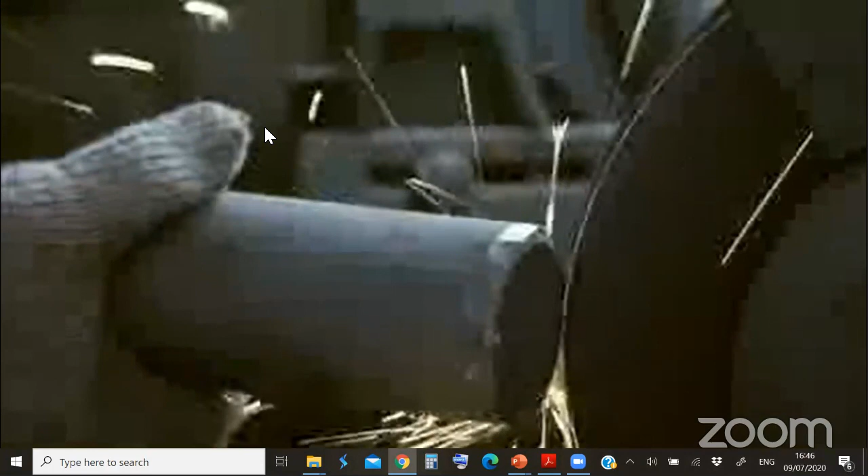I came to work that morning. I saw my friend Ramesh feeding the birds. The rest of my colleagues were busy in the workshop. No one was expecting the foreman Tariq or us to help him at the pit. Hi, good morning everybody. Come, let us go to the man. The foreman told us to come and finish a small job and we would do the permit later. The team set off, without a permit, to work in a hazardous area. This was a deadly shortcut. It was to be their last journey.

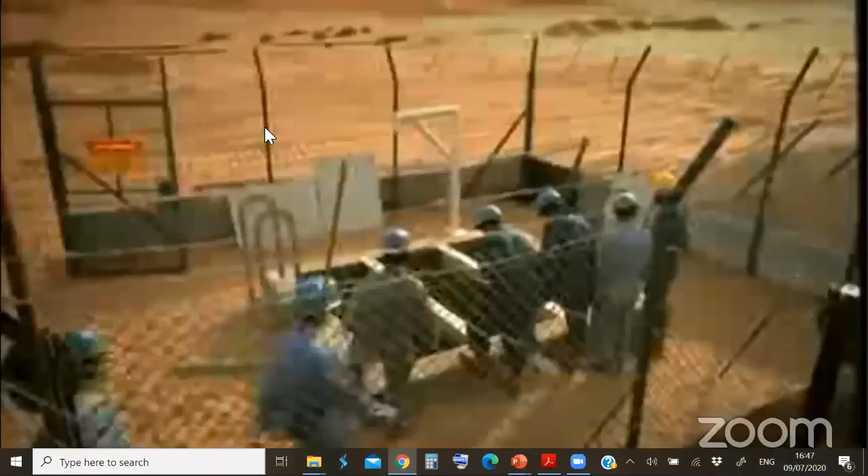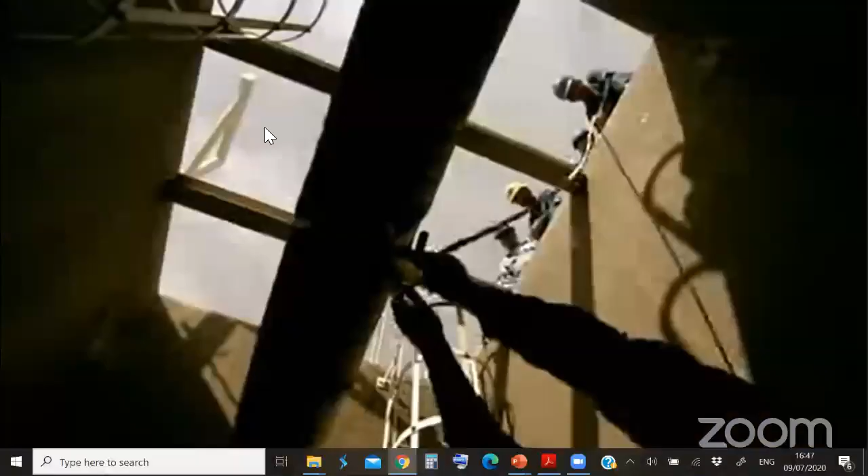Hydrogen sulfide, commonly known as H2S or rotten egg gas, is invisible, heavier than air, and deadly, even at low concentrations. Ramesh descends into a toxic death trap. Ramesh was told to go down into the pit and fix the rope that had slipped off the valve. Then I saw him climb up the ladder to the second and third step, and then he fell down.

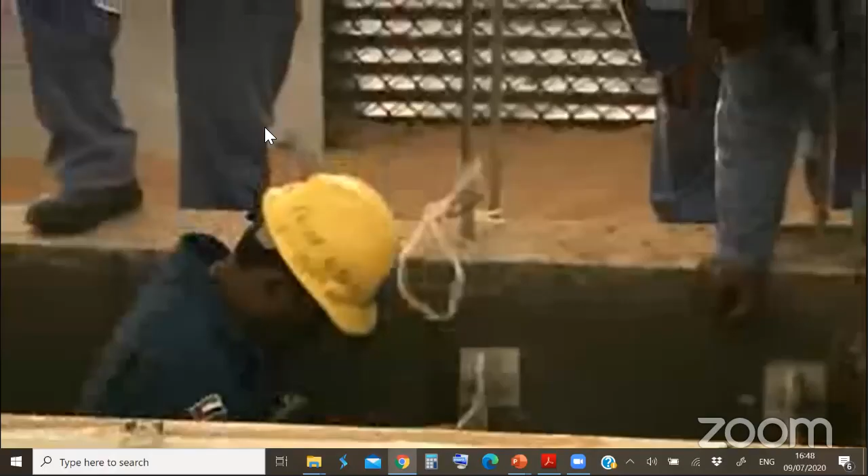The foreman called out to me, 'Stop the pump.' I didn't know what was going on. I could see Tariq trying to lift Ramesh up, and within less than a minute, Tariq had collapsed to the ground. Panic takes over. Kabir rushes down into the pit. Mustafa leaps down the other side, but the men have less than a minute of exposure to H2S before they fall unconscious.

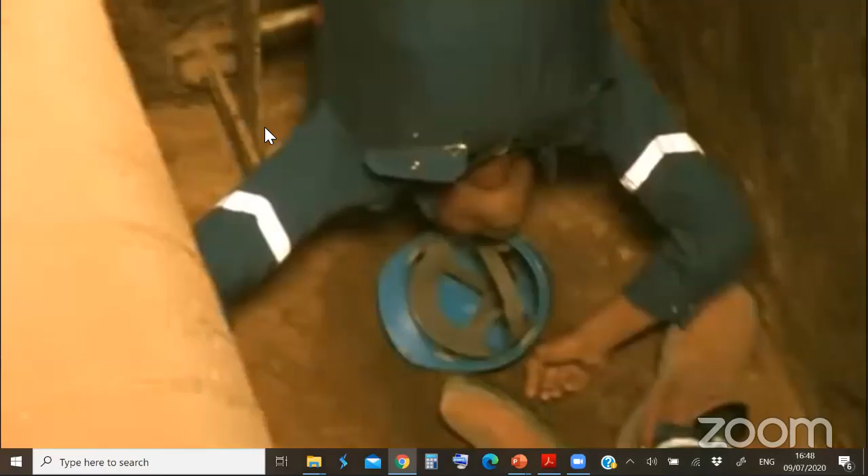Hello? Hello? What? Kilometer 58? Okay, I'm just coming now. Hello? Hello, there is an accident at kilometer 58. Please initiate the siren immediately. Emergency at kilometer 58. Please mobilize.

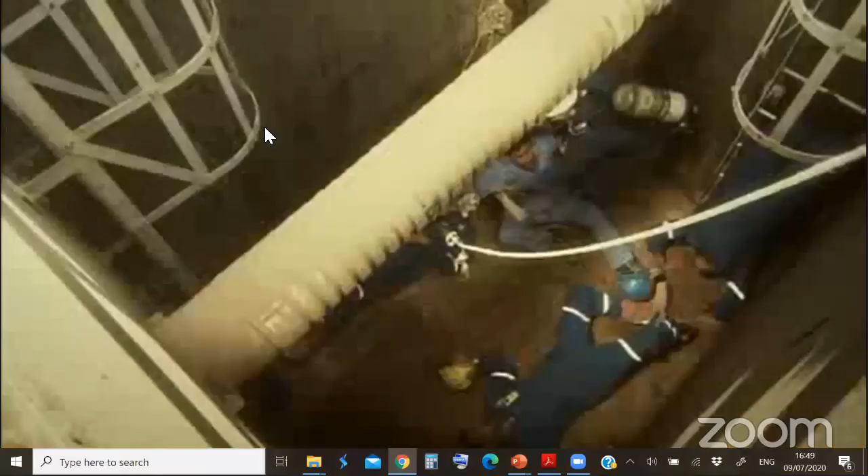And everyone was shouting, 'There is gas, there is gas.' I was afraid, but I knew I had to help them. When I reached that location, I immediately came to know this accident was because of H2S. And I saw Sabar already there trying to lift Mustafa. It was really shocking to see all of my foremen and my labor lying on the ground. I was lost for a moment. I really felt how this had happened. It was a big shock for me.

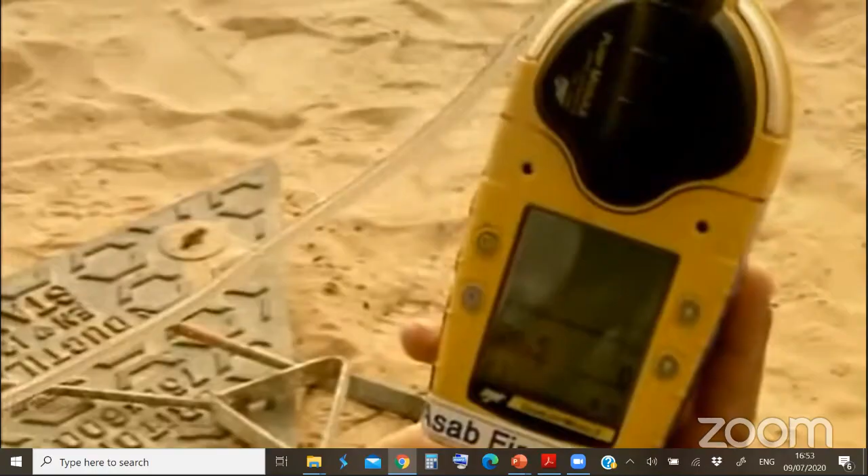Each individual in the field has been provided with an H2S detector. Even the contractors, even the laborers, even the drivers. What are the risks we will be involved in this job? First of all, H2S, hydrocarbon, oxygen.

Hydrocarbon industry is a risky business by nature, and safeguards are developed to ensure that we protect our employees and the contractors that are engaged with us.

A lesson that came across these procedures: there are times that due to over-experience and complacency, these procedures are not fully adhered to. This incident is one that should never be repeated again and should not happen again to our operation. We shouldn't be encouraging shortcuts. Shortcuts, unfortunately, are long cuts, and people are hurt.

Keep people aware of H2S and the consequences of having this gas released. Also keep training. That's an important part of our business. Training, training, and training.

Okay, tighten from the arm. Just pull backwards.

Gentlemen, we must remember that we work in oil industries. There are rules and safety rules available, and we must follow these rules.

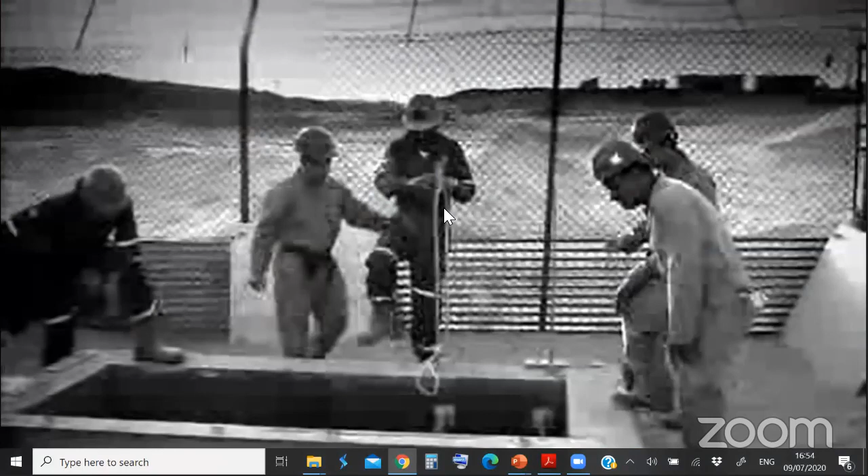ATCO permit system is designed in a fully safe way actually. There are a lot of controls in place before anybody starts the work. We have a job performer, we have a job originator, we have area authority, we have issuing authority, we have gas testing. And all are independent.

Nobody, a single person is not responsible for it. There are about 5 lines of safety involved to do a job. And if you follow that permit system, you will never go wrong.

We need to safeguard our system from any future accident. We should and will never allow this accident to happen. It's our responsibility to avoid such accidents from reoccurring.

Lots of lessons have been learned from this tragic incident, and we have engaged the whole organization to make sure that we do not face this kind of threat.

We understand our lives by looking backwards, but we live them forward. So we keep moving onward, never forgetting those who have passed, because their memory will inspire a safe future. We will remain an unbroken chain, linked together and dependent, safeguarding what we value most: our lives,

Moving on to the next slide, what is upstream? Upstream is E and P, which is exploration and production.

So what we do - Bala Suryan is raising a hand. Yes, Mr. Bala Suryan, you can leave your doubts in the chat box, I can read it. Sorry, can we proceed? Can't chat, sir, sorry, I cannot message you. I can't hear you, Mr. Balasubramanian. Why can't you message? You can message to admin. Okay sir, he can read that.

Yeah sure, okay. So what is upstream? Upstream in the sense it is exploration and production. What is exploration? What do we do?

Before starting any oil field, before starting any production, before starting any kind of drilling, what we do is go and explore the field. We have divers, we have geologists, we have remote specialists - so many people are there. They go and explore, they take a scan of the complete area, and then they give us a report.

This oil normally comes from our earth core, and then we drill it and take it out. So this crude oil - what is crude oil? Crude oil is actually an ore, it will not come as an oil, it comes as an ore. Ore means a mixture of so many oxides, liquids, fluids, and residues. This ore, what is crude, is called black gold. This crude, what we take, we cannot use it directly. Whatever you are fetching in your vehicles - petrol, diesel, kerosene - all comes from crude. How does it come? What is happening? We are feeding this crude somewhere, and then something is coming out.

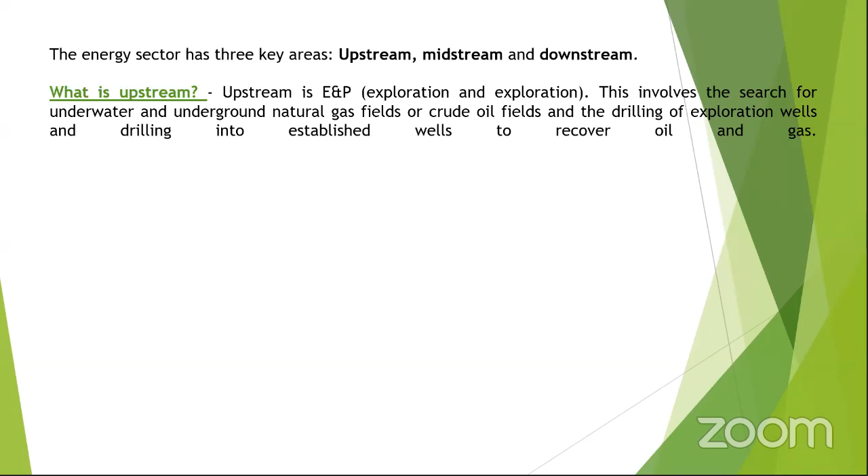Next is what is midstream? Midstream is nothing but the preliminary crude oil processing, storage, and transportation. In upstream, we already took out the oil from the earth crust. Once it is taken out, we need to do a preliminary washing and processing. We'll check what washing and processing means in the next process flow diagram.

Next is downstream. What is downstream? Downstream is mainly a refinery. The refinery product is coming to you as a domestic product, or you can say retail products.

So the crude oil - can you see the cursor, Shiva ma'am? Yes, I can see the cursor.

Okay, so this upstream means we are actually taking out oil from the earth crust. This part is only taking out drilling, exploration, and production - that is E and P. Next is midstream - midstream means we are just doing the preliminary processing, washing the crude oil, taking out the gases, and giving it to the downstream.

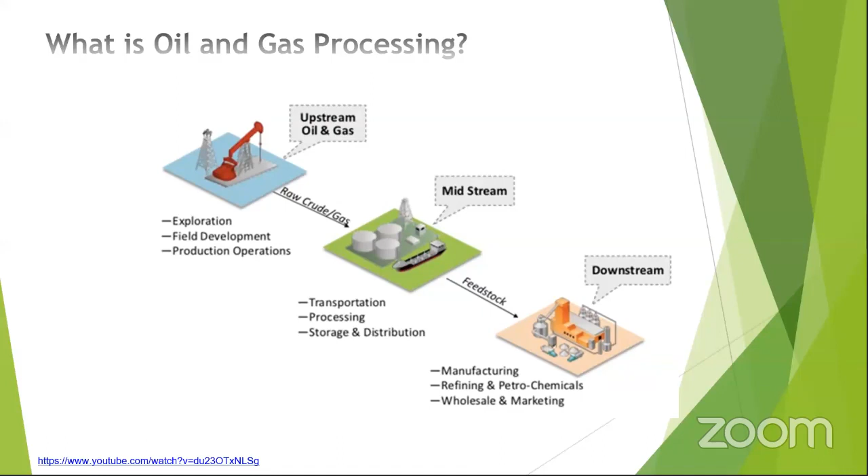From the refinery, all the residues go to so many other companies - ethylene plant, ETP, TTP, WWTP, STP - so many plants are there. You can see paint companies, resins, rubber, and so on. Nothing from the crude oil is a waste. Even the residue is used as grease and bitumen, tar for laying roads. So anything A to Z from the crude oil is used as a product - hydrogen, wax, a number of products.

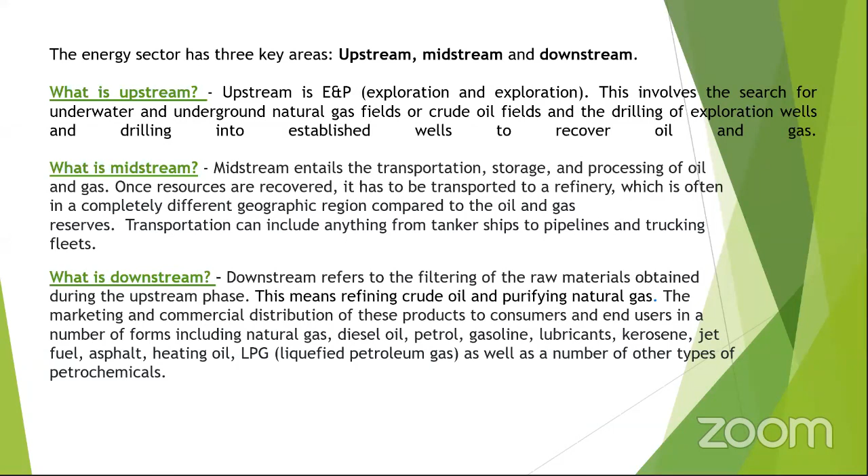Excuse me. Hello. Sir, you can continue, sir.

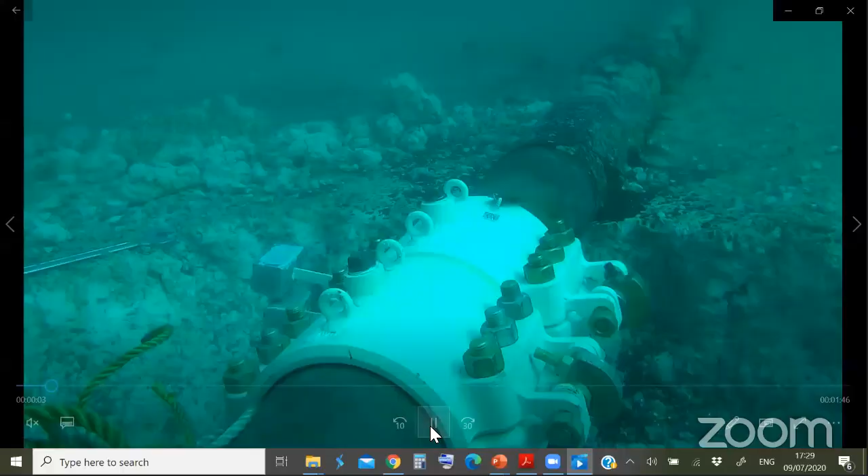Okay, hope you all saw that video, right? In the video, under the seabed, it looks like that. So that's how we will take out the crude oil. Hope you saw that video, right? Yes, we saw it.

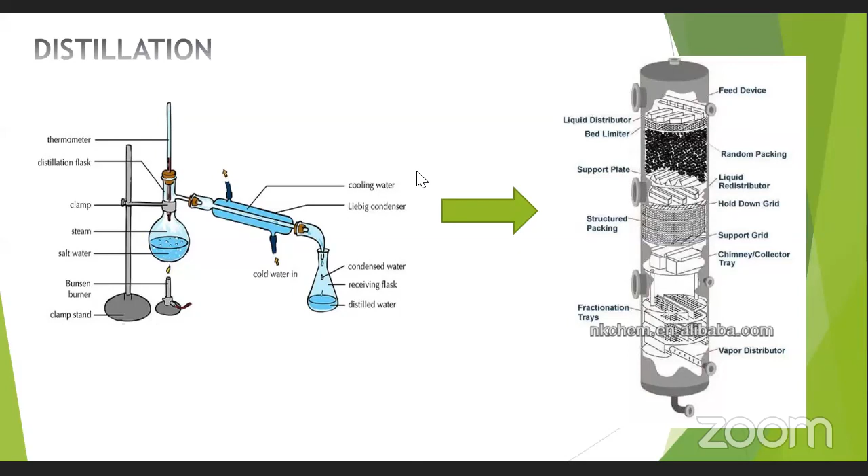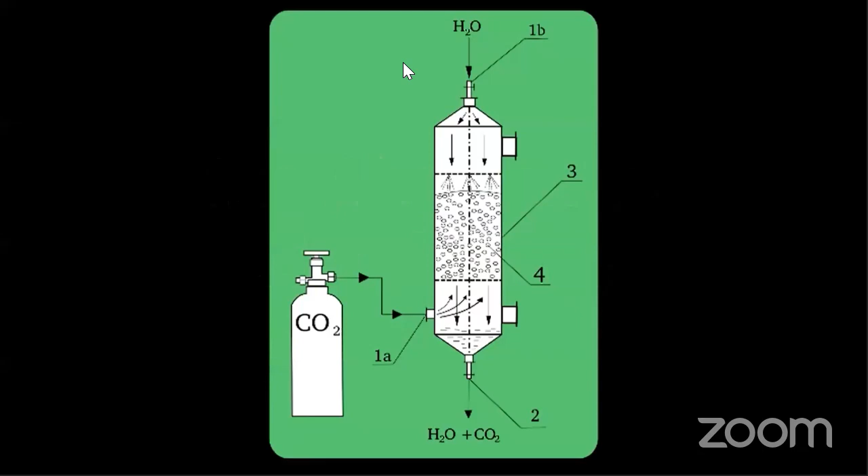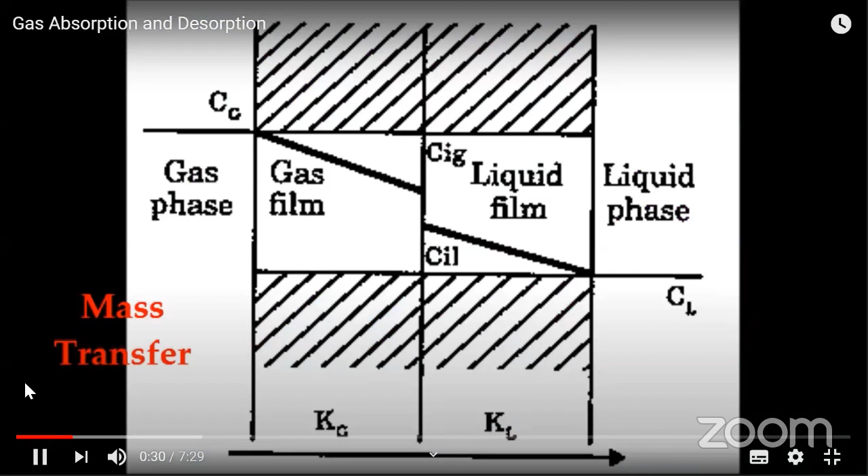Gas absorption or scrubbing is an operation in which a gas mixture is contacted with a liquid for the purpose of dissolving one or more components of the gas mixture and providing a solution of them in the liquid. Therefore, we can see that there is a mass transfer of the component of the gas from the gas phase to the liquid phase. The solute transferred is said to be absorbed by the liquid.

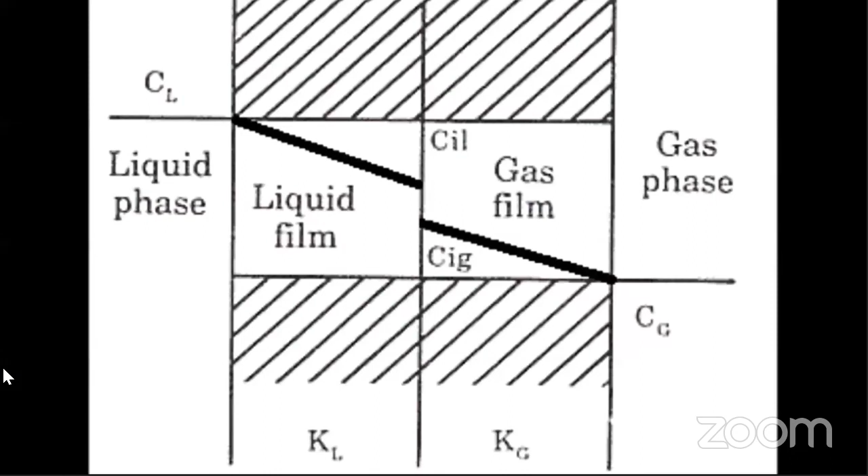In gas desorption or stripping, however, the mass transfer is in the opposite direction, that is, from the liquid phase to the gas phase. Here, two components of a liquid are separated by contact with the gas. The principles for both systems are the same.

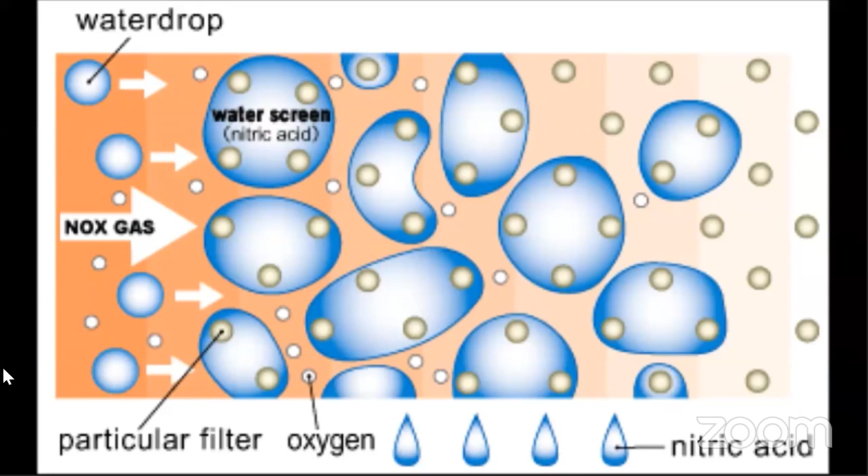An example of gas absorption is in the carbonation of beverages. Carbon dioxide under pressure is dissolved in the liquid beverage, so that when the pressure is subsequently released on opening the container, effervescence occurs. Another example is the removal of ammonia from air by contact with liquid water. Ammonia is very soluble in water, whereas air is only slightly soluble.

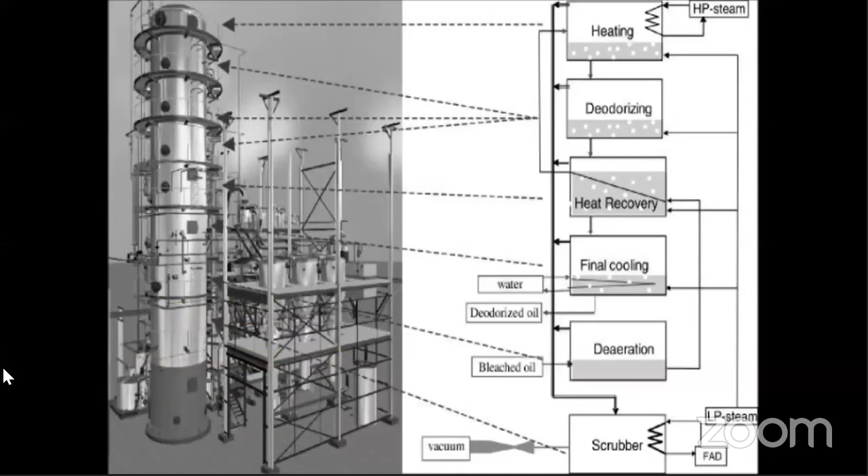For desorption, one example is found in the steam stripping of fats and oils, in which steam is brought into contact with the liquid fat or oil, and undesired components of the fat or oil pass out with the steam. This is used in the deodorizing of natural oils before blending them into food products such as margarine, and in the stripping of unwanted flavors from cream before it is made into butter.

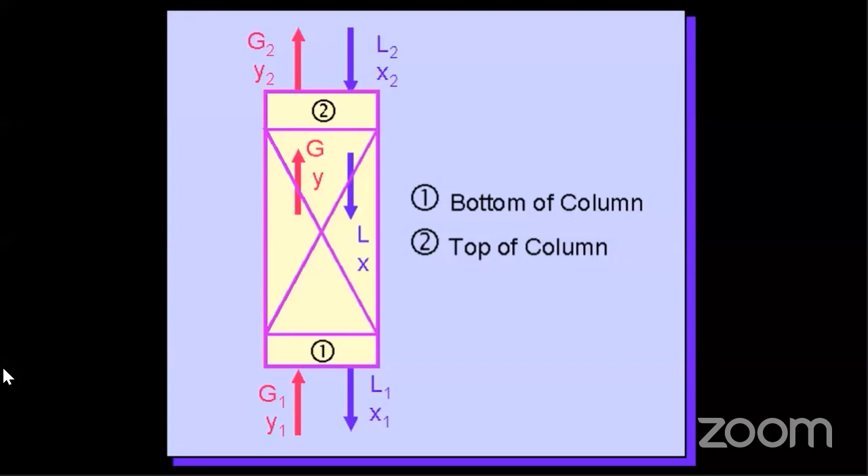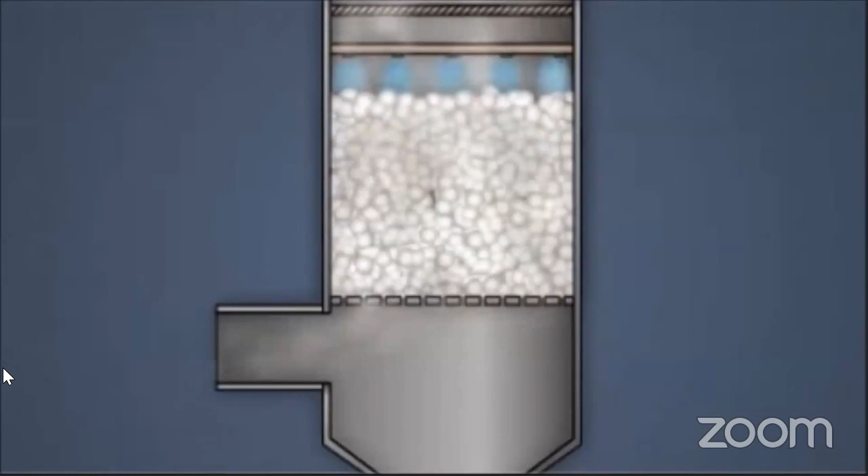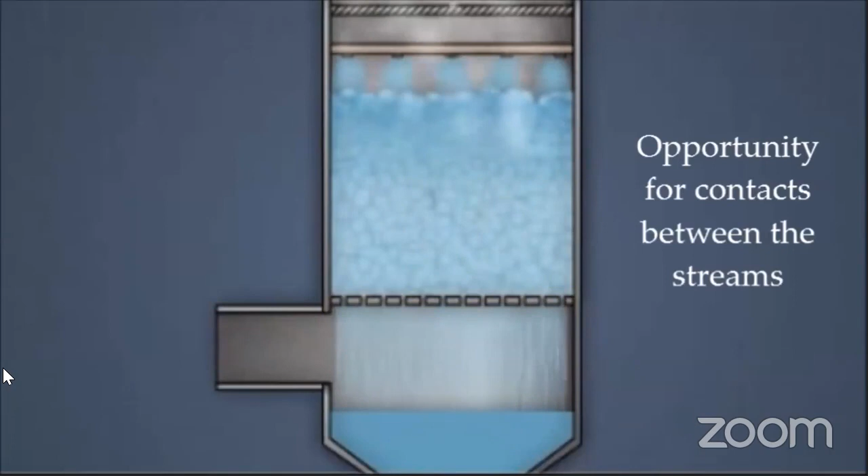The equilibrium conditions arise from the balance of concentrations of the gas or the volatile flavor between the gas and liquid streams. In the gas absorption process, sufficient time must be allowed for equilibrium to be attained so that the greatest possible transfer can occur, and also opportunity must be provided for contacts between the streams to occur under favorable conditions.

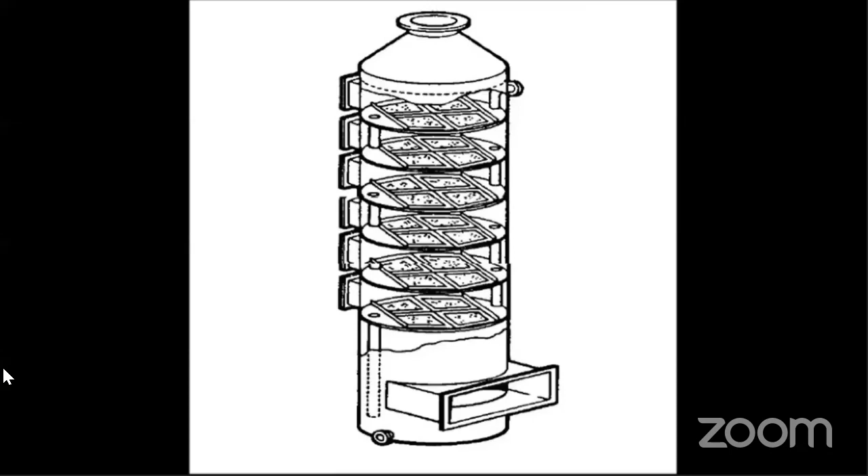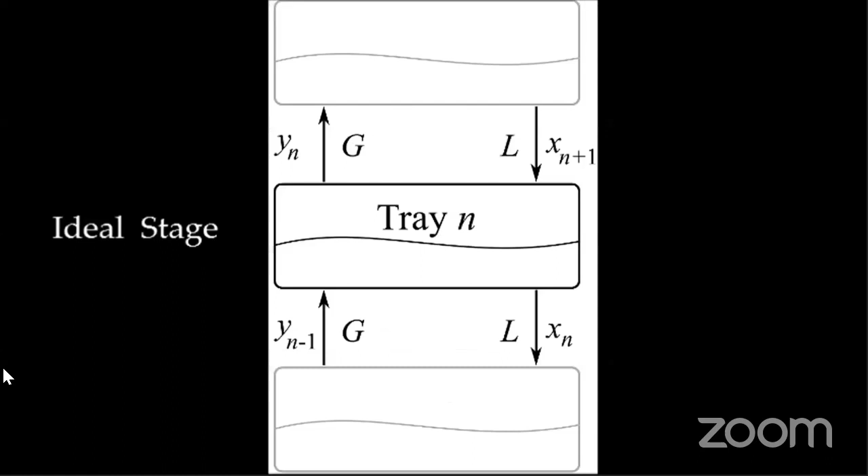Liquid and gas streams for absorption or stripping could be contacted using a tray column like that used in distillation. In a tray absorption tower, multi-stage contact between gas and liquid takes place. In each tray, the liquid is brought into intimate contact with gas, and equilibrium is reached, thus making an ideal stage. In an ideal stage, the liquid leaving the tray is in equilibrium with the vapor leaving that tray.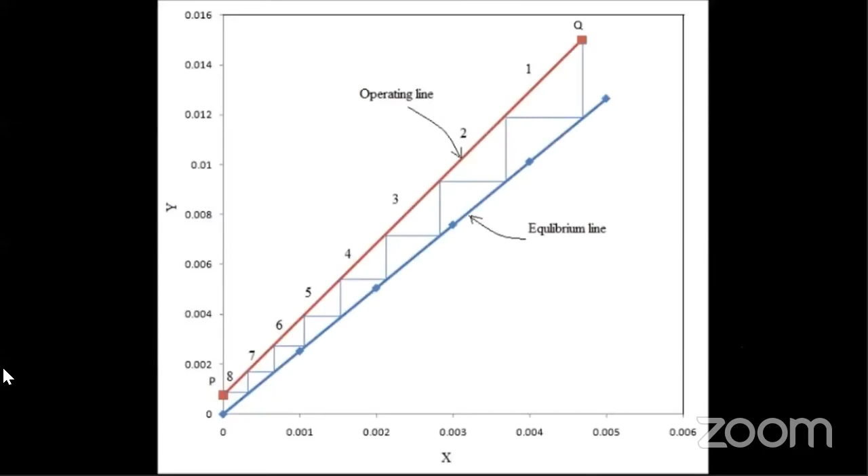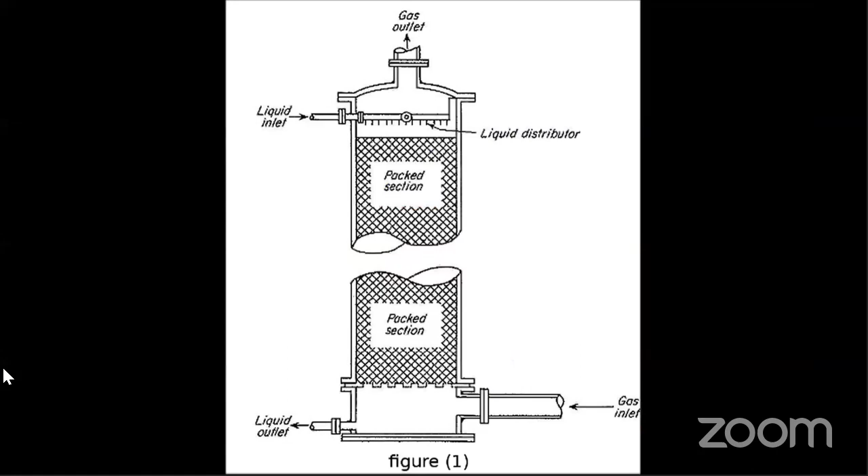The most important step in the design of a tray absorber is the determination of the number of trays. The liquid enters from the top of the column, whereas gas is added from the bottom. The efficiency of the stages can be calculated as shown.

Okay, hope you enjoyed the video, right?

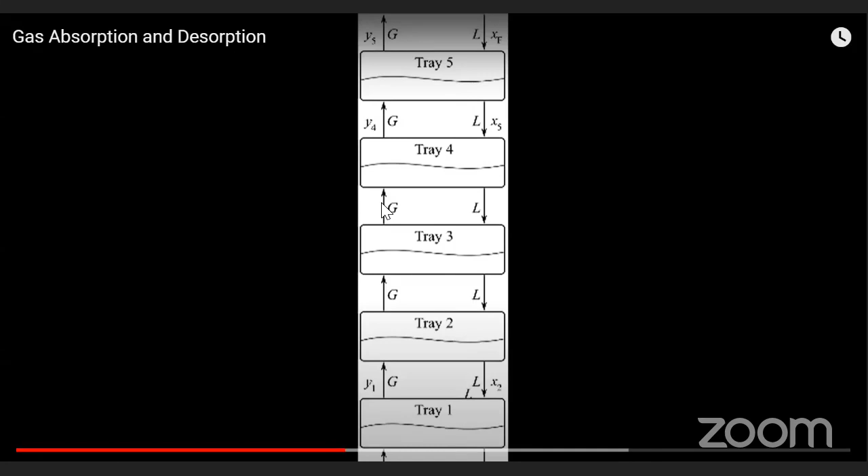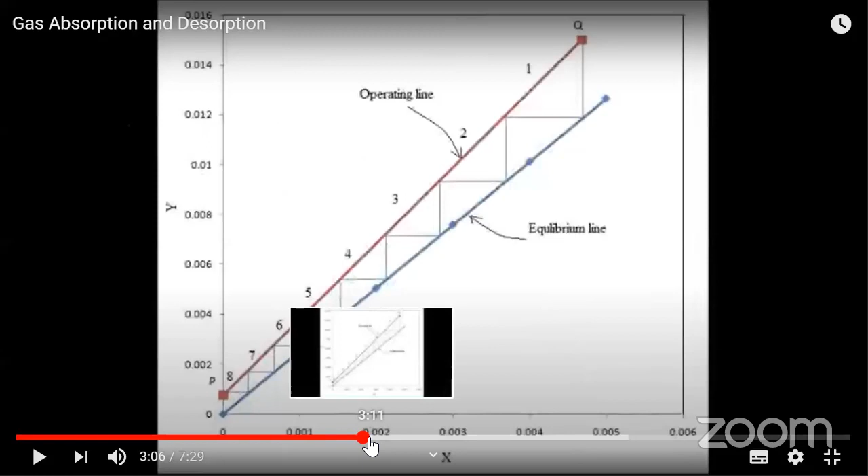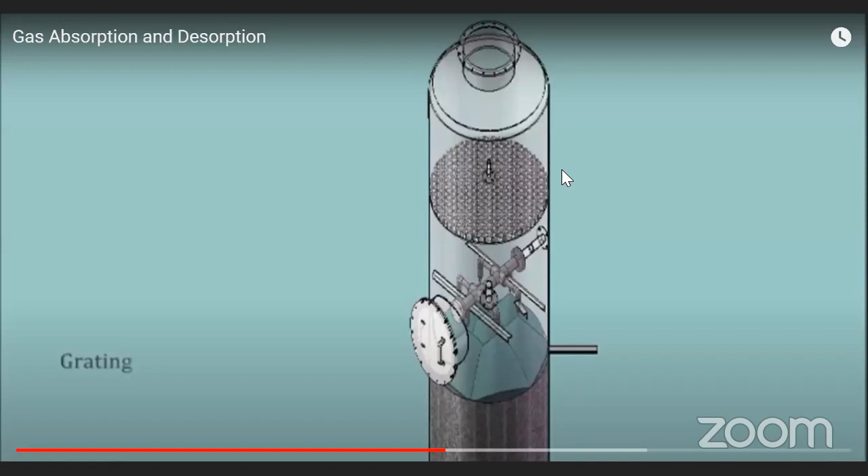Okay? Do you understand? Can you people understand? Anyway, hello. Yeah, we can hear you. You can continue. Okay, ma'am.

Okay, so moving on to the next slide. This is the typical gas treatment. Someone asked how we are treating the gas, what is the gas sweetening process. See, globally the gas treatment is the same. Globally nobody will tell you that we have this kind of different setup, they will call it differently. This is actually a screenshot I took, I think it is from Google.

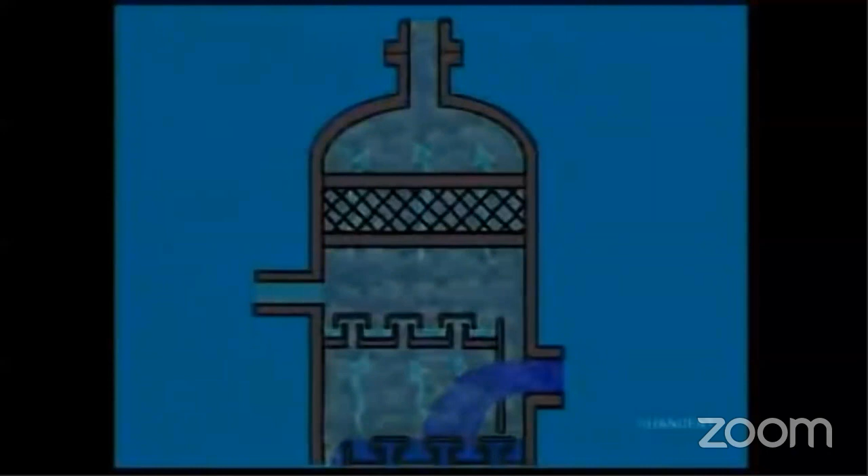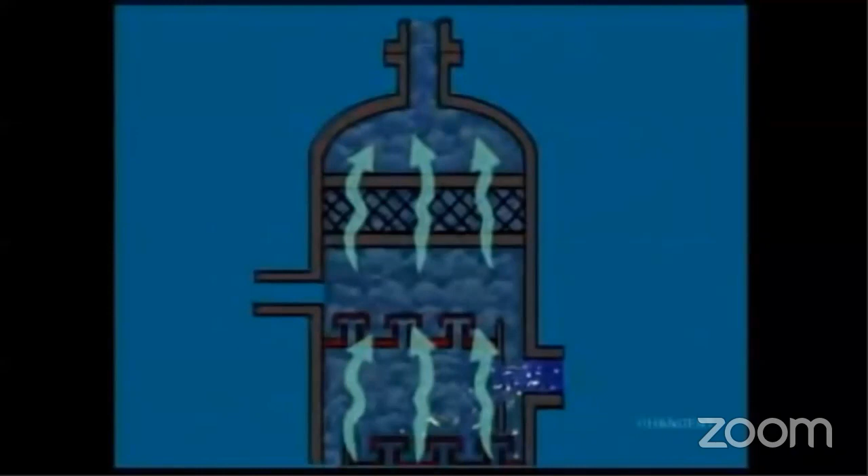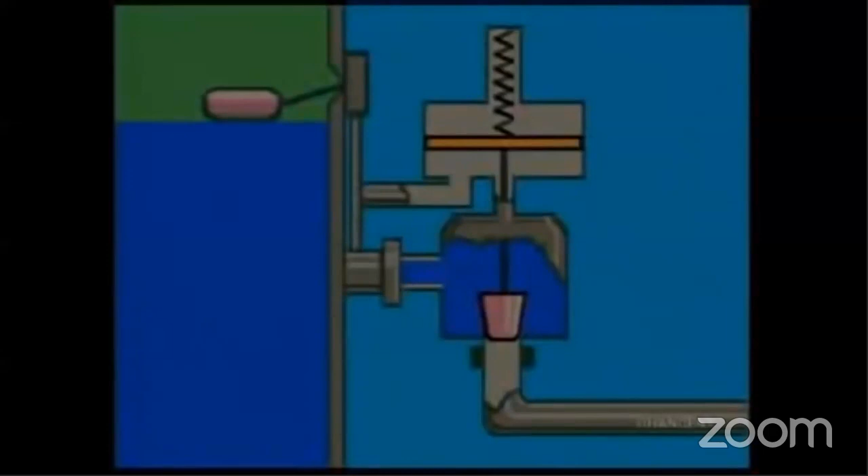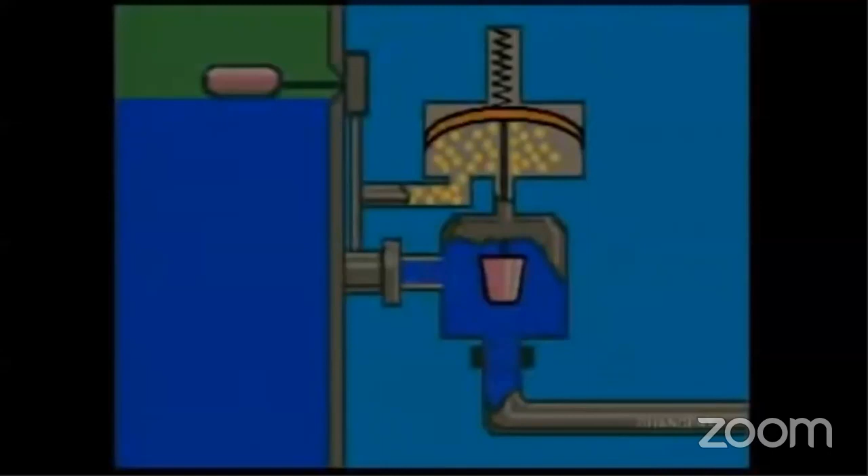Level control on the stripper is important in stabilizing operation. The level controller should be adjusted, as in the contactor, to hold a uniform flow rate of lean amine out of the stripper. Flow rate surges will cause the reboiler to operate inefficiently and may overload it.

Reflux is a process where a fluid is removed from a vessel, condensed, and returned to the vessel to enhance the process. The reflux system consists of the reflux condenser, accumulator, and pump.

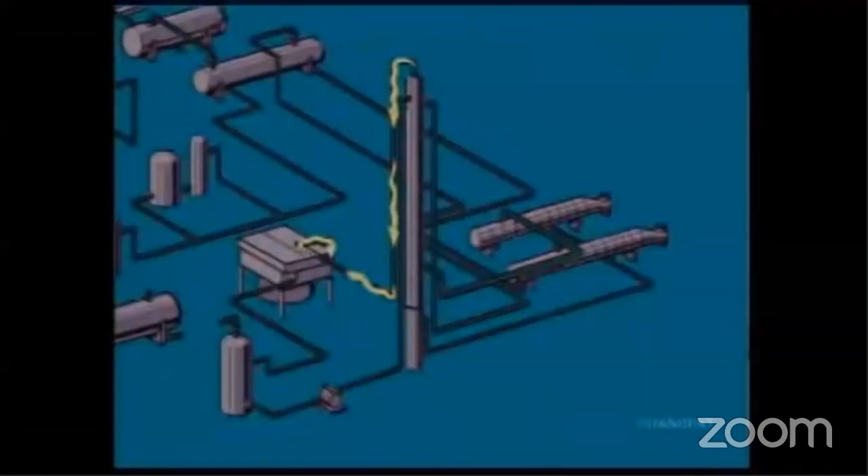Overhead vapors from the stripper, mainly consisting of water vapor and acid gases, pass through the reflux condenser, which condenses most of the water vapor and the small amount of amine solution which may have vaporized in the stripper.

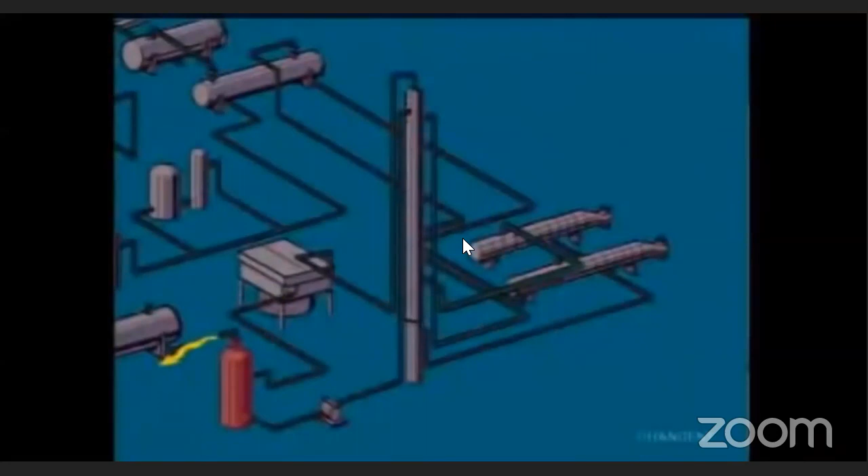This two-phase stream flows to the reflux accumulator, where the acid gases are separated from the condensed liquids. The acid gases may be sent either to a flare stack or to a sulfur recovery plant, depending on the amount of hydrogen sulfide present. The condensed liquids are pumped to the top of the stripper for reflux.

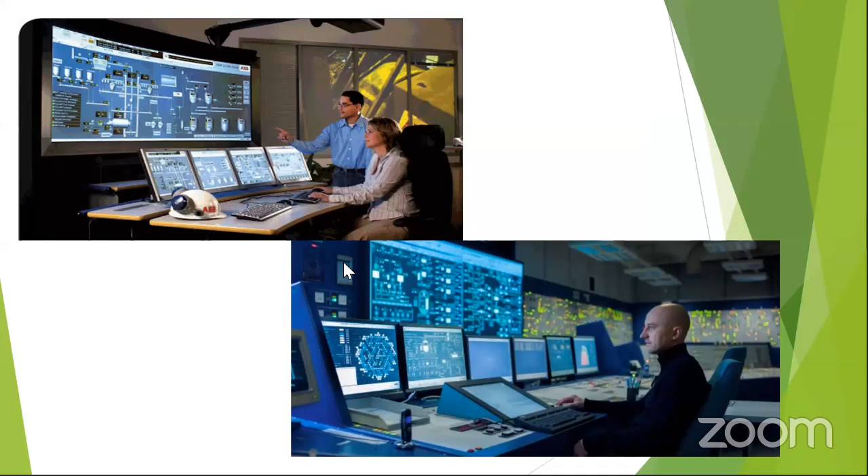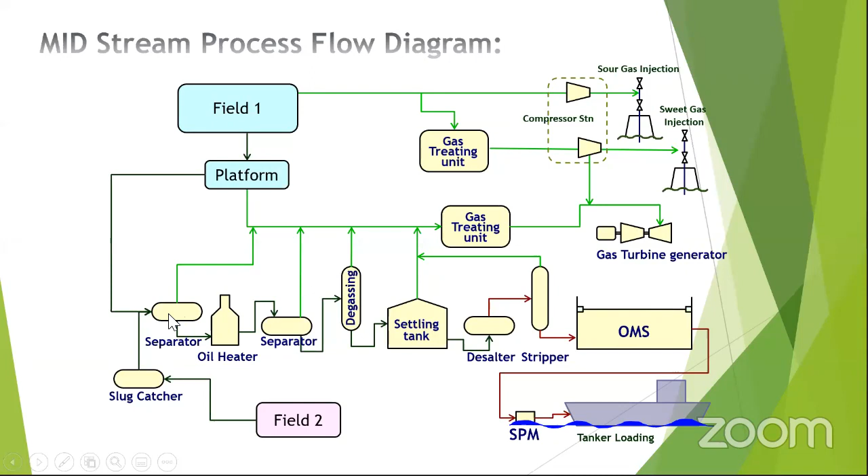So there are so many process parameters. Each and every process parameter will have a separate sensor. We have probes, level sensor, LT, PT, TT, so many things. LT means level transmitter, PT means pressure transmitter, TT is temperature transmitter - so many sensors are there.

So these field equipments are connected to the master control room. Whatever happens here, you have a local control panel which is communicating to the master control room, and this local control panel is connected to a field panel. This field panel is connected to the field instrument. The field instrument is connected to a sensor or probe, whatever you call it, which is connected to the process equipment. This is how the signals are passed to the control room. So from the control room, whatever you control, it goes vice versa - it gives signal to the LCP, then to the panel, then the transmitter, and it operates. This is how it works.

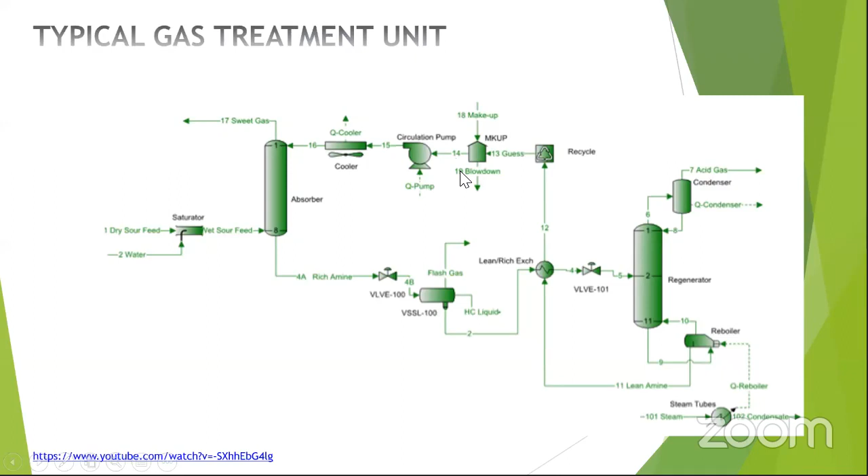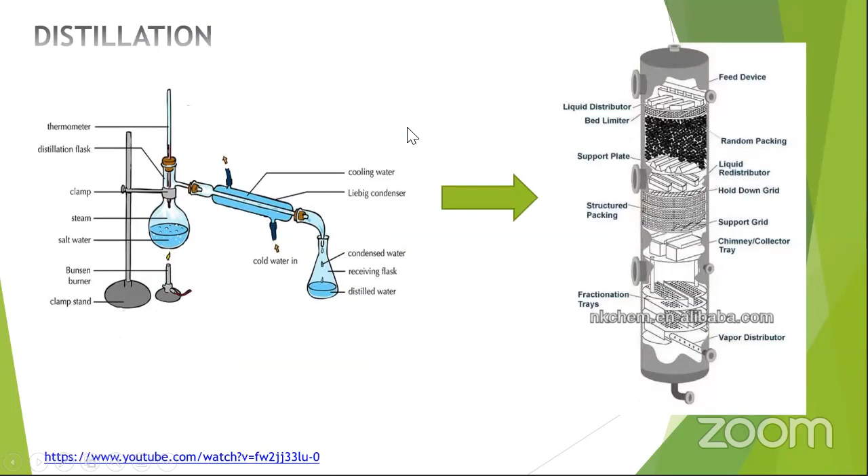See, here the screen is showing something else, and here it shows 13, 14, 19, 15. What is this? What is all this? And here it is different. Everything is having a difference - here it is different. What is it? How can I standardize everything? So this is the next slide.

Before manufacturing a pump or a pipe, who decides if it's a 2-inch pipe or 4-inch pipe? You as a chemical engineer decide. So chemical engineers actually give feed for any project. They are the first feed of the process, they just start. From there, others come - instrumentation or whatever - they first consult with the chemical engineers, the process engineers.

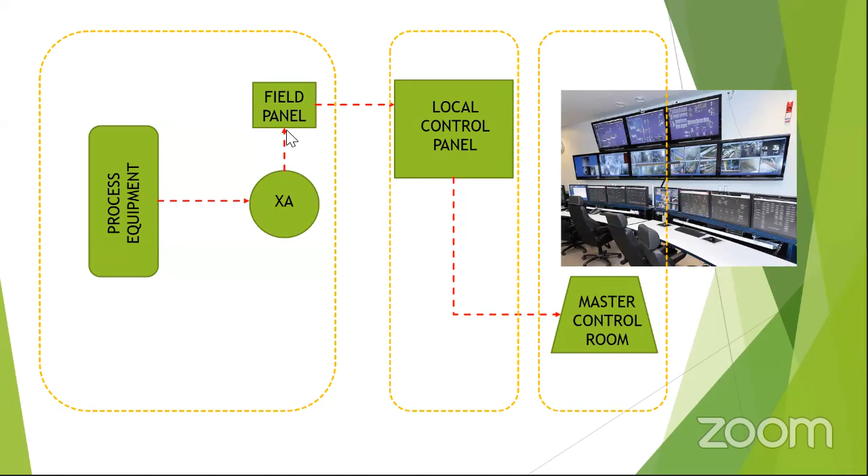So this controller is actually - I'm sorry, Miss Vanmadi, you have to mute.

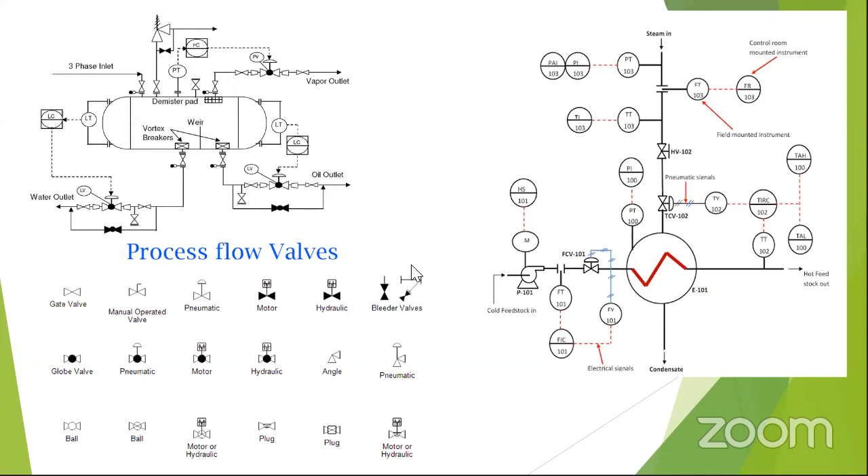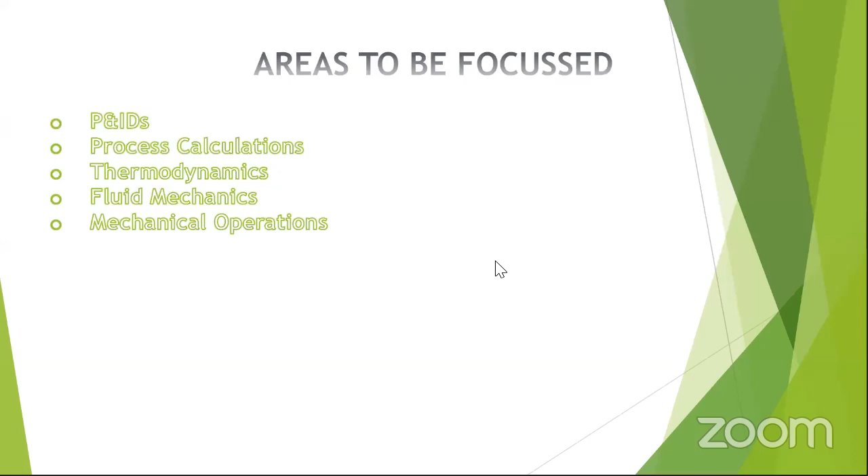If you are not sure, please go and ask. Don't get shy or feel anything. Nobody is going to chop your head off. Even if it is a small silly doubt, go ask, confirm, and do it.

The third point is never assume or imagine. If you have a document, for example in the oil and gas industry, never assume. Not just oil and gas, any sector, never assume things. If you have a document, if you have something in your hand, see to it and do it. If you are not instructed or not sure about what you're going to do, do not do it. It may harm or it may even result in a fatality.

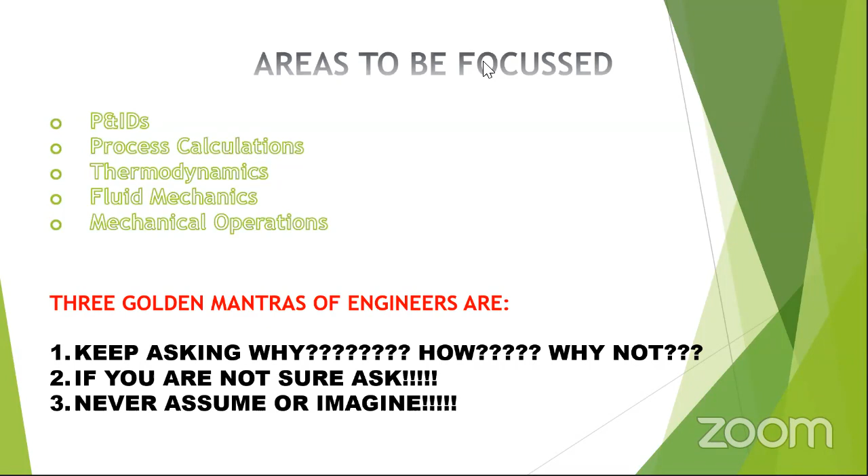Done, I'm done for this session. You can ask your questions now.

Query session. Ajit P has asked about the future scope of petrochemicals. What is the future scope of petrochemical?

Future scope of petrochemical, yeah. Petrochemical in the sense, actually it is a downstream industry, ma'am. Frankly speaking, never consider the market situation or crude oil prices and all. Nothing is going to harm you because the crude oil price you see is WTI crude, West Texas Intermediate crude, and it has nothing to do with our world global market. This petroleum refining, in the sense, whatever crude oil. Petrochemical industry is actually a byproduct industry, so it will always have a good scope, ma'am.

Any other questions? And lastly, Jagadisan has asked whether the quality of petrol or diesel varies with places.